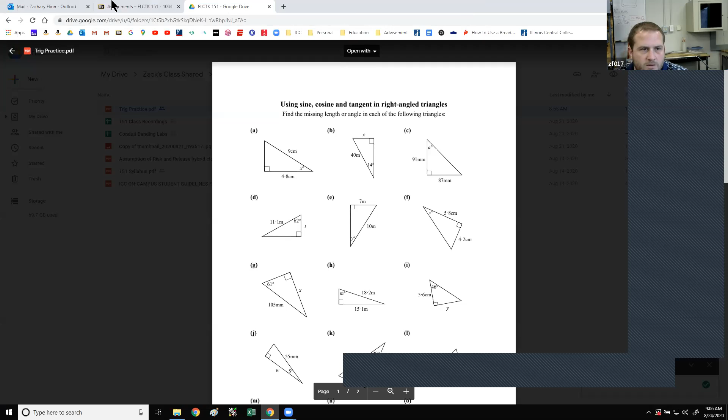Okie dokie, find this trig practice deal, and maybe I'll do this.

Let's start with A, B, C, D, E, and F. If you guys want to do those on a scratch piece of paper, and then we'll go over the answers together, see them worked out, we can do that. We'll just spend some time this morning doing some practice, and then if everybody's ready to go, we'll take the quiz.

Capiche? Sure. Yep. So, how can I do this?

Why don't you all take your turn? Is that supposed to be 4.8, or is it 4 times 8? Yeah, if you see the dot, that's supposed to be point, like 4. Oh, okay. And on D, it's 11.1. Okay.

So why don't you all turn your videos off, and then when you're done, turn your videos on, so I know. Which ones, A through D? Let's do A through F. Okay, can you see A through F on my screen? Yeah, okay. You can open them up on Drive, or you can use my screen, whatever you want.

Is anyone else's screen getting blocked by something? Yep, yeah. What's the matter? There's a text block in the middle of the screen now. Is that better? Yep, yeah.

Virginia, are you done by chance? Yeah, just up to F, right? Am I supposed to be able to see the rest of them? No, you're just supposed to show your video when you're done so that we're all, but as long as you're done, we can. Just a second. Oh, you don't have, now that I know you're done, you don't have to, but all right. Okay.

Is this like a test or just practice? No, this is just practice. Okay.

Can y'all see my whiteboard? No, oh, there's a carbon fiber big square block in front of it. There's a carbon fiber square. That's nice.

You can't see what I'm doing? Oh, it's just a big block in front of everything. Yeah. How about now? There we go. Good. Yeah, see the whiteboard? Yes, yes, okay.

A, what did we get? Ooh, purple. 57.77, I don't know, degrees. Yeah, I'm just going to run with these. If you guys got something else or if you need me to work through it, let me know. I'm all good there. B, 9.68. Yep, roger. I feel smart right now. I hope that don't change.

C, 43.71, degrees, yeah. D, 5.21.

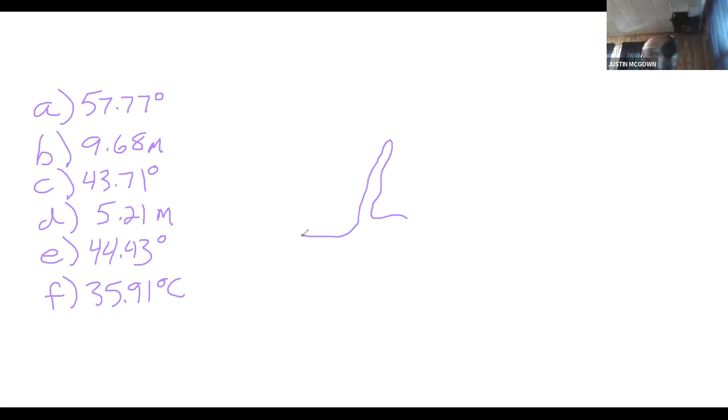Freedom units. All right, so seems like you guys are good. Yeah, it seems like it. I'm happy with my understanding. Oh my God.

Industrial accident on the thumb. Got caught in a press. Yeah. That's not any better, Zach. I'm just saying.

Are classes free for you? Because you could get an art class and get... Oh, so you're flipping us off. No, that's a thumbs up. Sure it is, yeah, sure that's a thumbs up. A little single finger salute there.

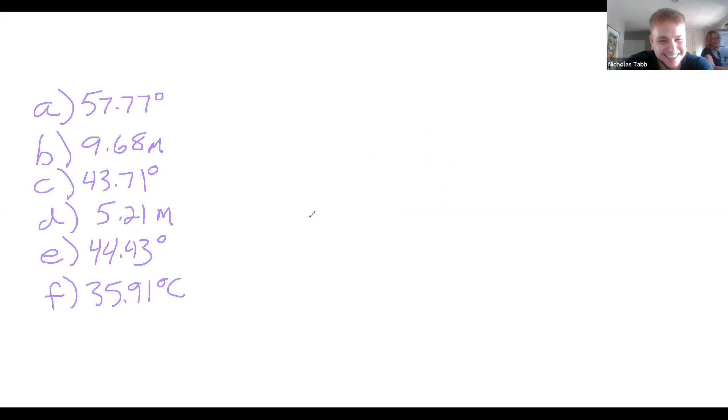Hi, Nick's mom. Are you making us all coffee? Because we need it. That's my girlfriend, that's not my mom. Hey, way to go, Nick.

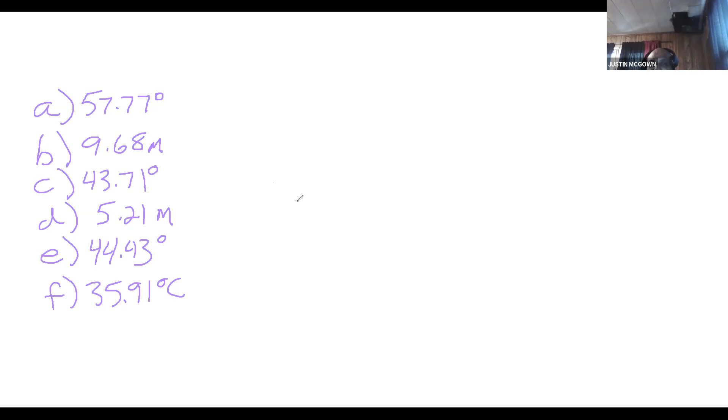All right, well we can do some more examples or we can go ahead and take this quiz. I think I'm ready for the quiz. I don't know, here's the thing, what you're going to see on the quiz is set up a little bit differently. I'd recommend using paper and drawing it out because it's going to look a little confusing. But it's going to say something like...

A, B, C, and then the opposite of those angles is going to be big A, big B, big C. And then there's going to be a table. I don't like this already, Zach. You do or you don't. I don't like where this is going. It's all math, it all stays the same.

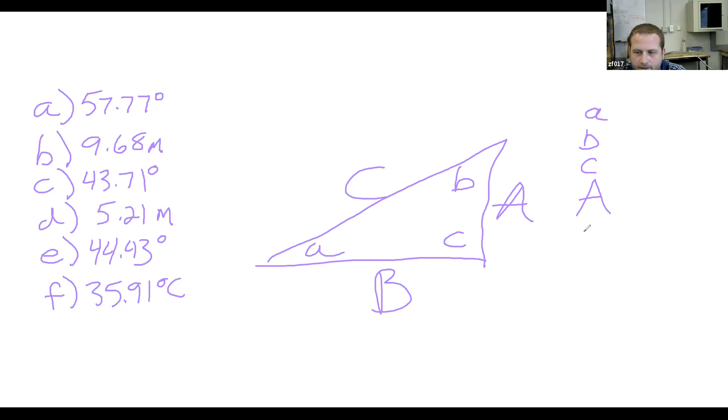Okay, so then it's going to say A is 26 degrees, big A is 5 feet. Find what C is. So if I'm you, I'm redrawing this thing so it looks like this, and put the numbers in. So this would be 26 degrees, A is 5 feet, and we need to find this.

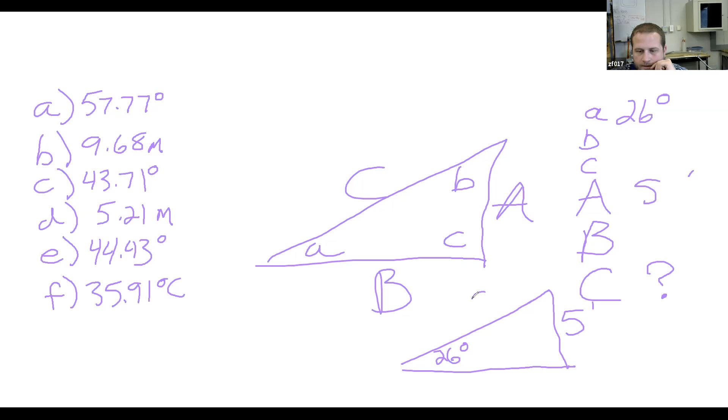All right, this looks a lot less confusing, right? I'll draw it on a piece of paper. Why can't we just keep it simple? I like the KISS method. Why can't we just keep it simple? Well, okay, here in 8 weeks you can teach yourself this class and then you can draw up these tests however you want, Justin. Oh, all right, I'm gonna go for that then.

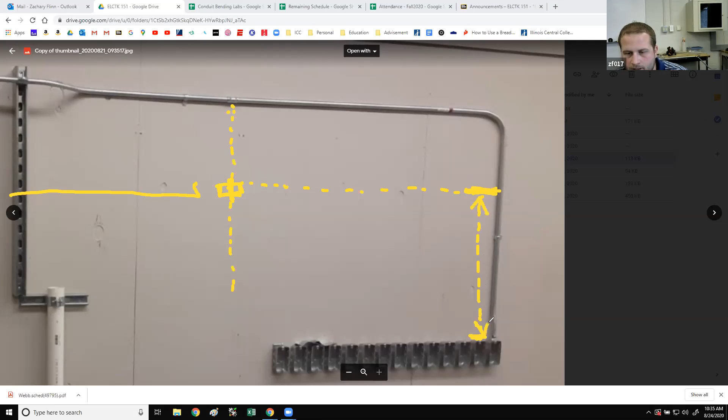Because the next pipe down right here, cut inside of it, is going to have a smaller length this way and a smaller length this way, right? That means the stub's going to be shorter each time, huh?

Yep. So what I want you to do is, if you're working on this lab, I want you to take the next space down. Make everybody else do a 3-point over yours. So the next person is going to come from this next coupling down.

So this is 1/2 inch EMT. The other one, the third bend, is this right here, and I haven't put a pipe in there yet, but there's going to be a little 3/4 inch EMT, and then you're going to have a 3-point saddle going over this pipe and back down and over. And then we're just going to call this a set distance. So you just match whatever I put up there for length and put your pipe in.

And then when you're done with a pipe, you're going to put your initials on it in Sharpie, for 2 reasons. One, it shows me that you're done with that lab. So up in here somewhere, I'll put my name, and then you put your initials on there. So one, I know that you did that bend, and two, it kind of causes you to take a little bit of pride in your work. Everybody's going to see your 4-point saddle, you know?

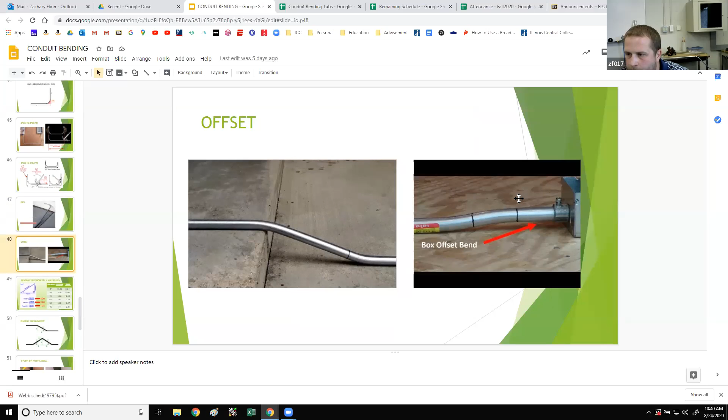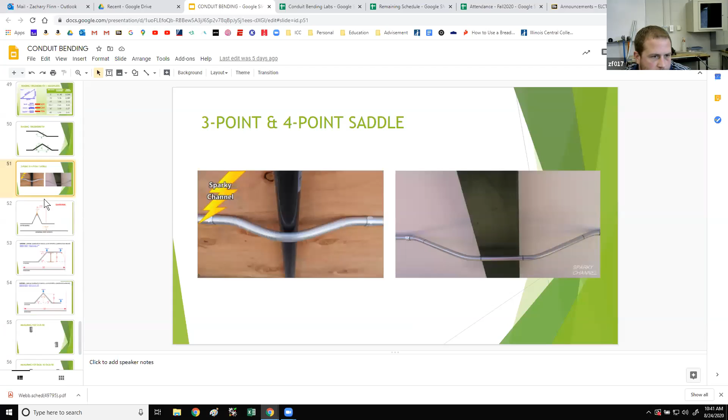Okay, real quick, I want to show you on Blackboard some other things. If you're doing your labs and you get on YouTube to go back over how I showed you to do things, there's some other references for you guys to use too on Blackboard. Let me show you, I think it's this one. There's some videos you can watch, but this hand bending conduit should be a PDF.

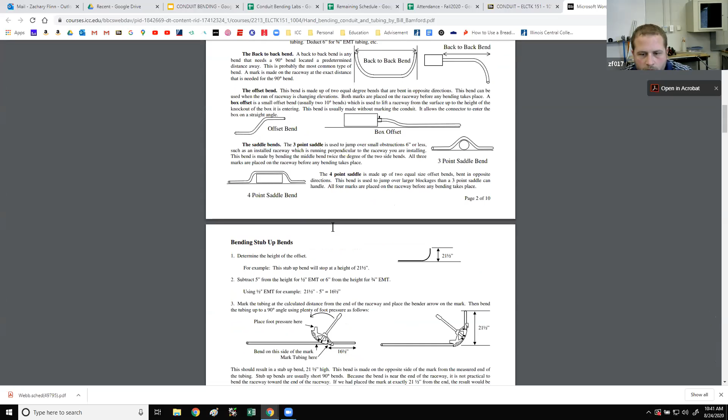It's pretty handy because you can see they show you exactly where to have the shoe, right? And for all these bends, it's important that you have the shoe facing in the right direction. Like the back-to-back 90 that I showed you, if you on the second bend flipped your shoe the wrong way, it wouldn't come out right. It wouldn't be the measurement that you wanted.

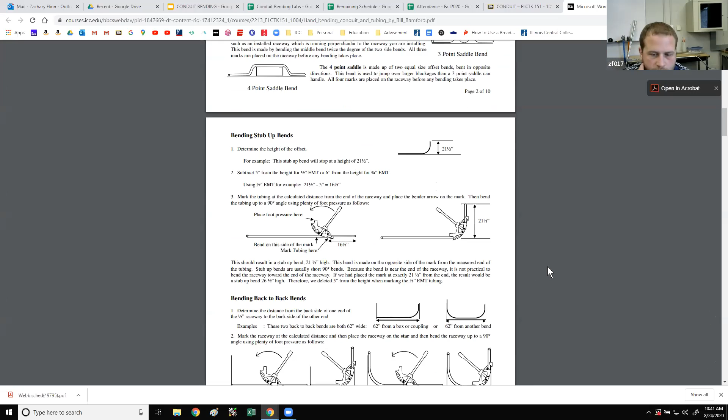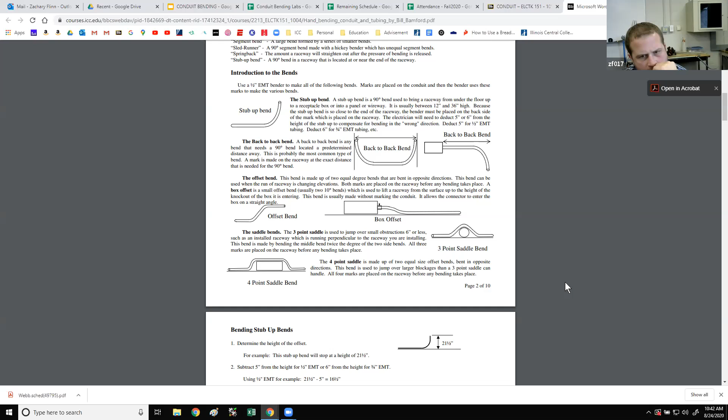Is this on Drive? This is on Blackboard, but I can put it on the drive. Oh, okay. Blackboard's fine.

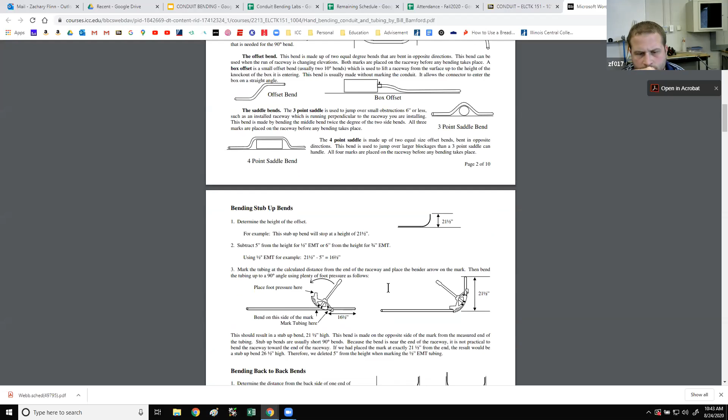I wanted to look and see where they put the rim notch or the teardrop, because that's what we're going to use today. The teardrop is used for the center bend on 3-point saddles. Here we go. So this page here is what I'm going to talk about today.

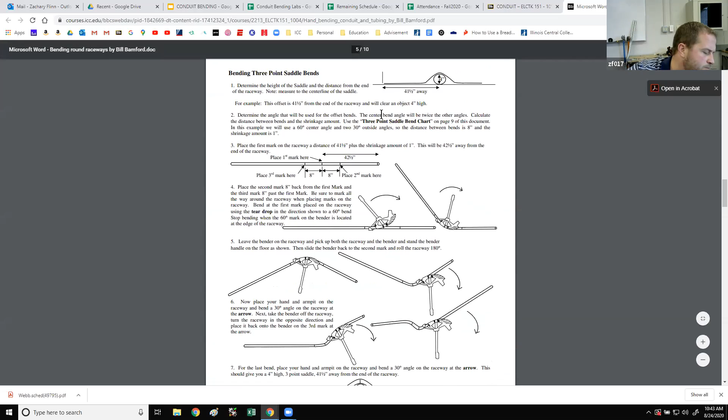Potential spam. Should I answer it? It's delicious. Is your car's warranty about to expire? Mm-hmm.

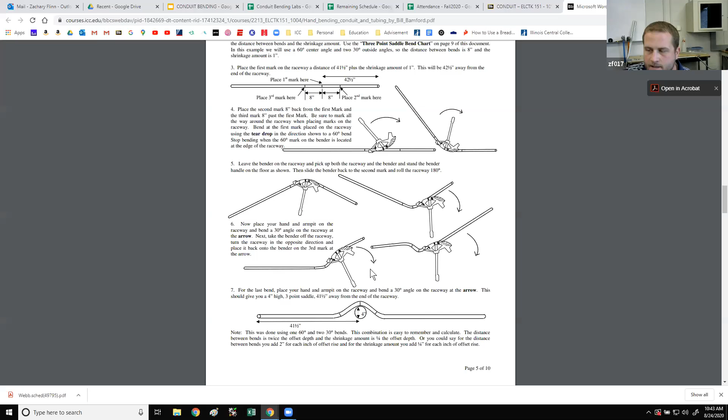Okay, you see where it says 60s and 30s? I'm pretty sure most benders are only going to have one rim notch. Yeah, some of them might be marked for 60s for your center bend or 45s. So we're going to use 60 today. And then 4-point saddles is actually pretty easy because it's 2 back-to-back offsets that you guys already know how to do. So, all right, here's the 3-point saddle.

I'm going to do this on 3/4-inch pipe. And I want the saddle to be 3 inches tall. So I want it to be 3 inches tall. And 30 inches away from my fitting.

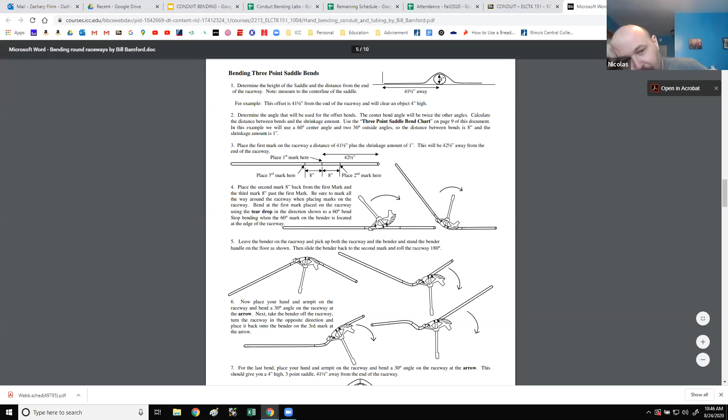Whenever you're ready, Zach, can you rearrange the camera? Why are you yelling at me? Caw, caw, caw. Oh, man. Whoa. That was weird. How'd you get on the ceiling?

Okay, so what I'm doing is I'm coming over 30 inches. So this distance is 30 inches. And my obstruction is, let's pretend it's like a pipe, 3 inches tall. Man, it's Monday, I can tell. 3 inches tall obstruction.

Remember the center bend that PDF tells you is 60? So if we were doing 2 triangles back to back, and this was 60, what would that make each of those? 30. 30. That's 30, 60, 90. Should be. But I'm not so sure that's right. That would make this 60. Yeah, that's right, because then this would be, it just doesn't look right. It looks backwards.

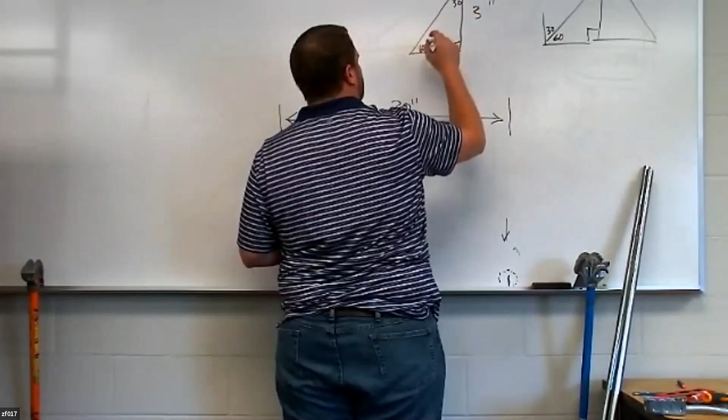So anyway, this is 3-inch tall obstruction, and we want this to be 30, this to be 60. So our pipe is going to look like this. I thought the center one was supposed to be 60 and the 2 outsides were supposed to be 30. Don't you bend the center one first? If you bend the center 60, then you're bisecting that in the middle. So you're going to have two 30-degree angles on either side.

Right, so pretend this line isn't there. This center bend is going to be 60. And then your two outside ones are going to be 30s. 30. Right, right. Yeah. I don't know. I'm really feeling the Monday.

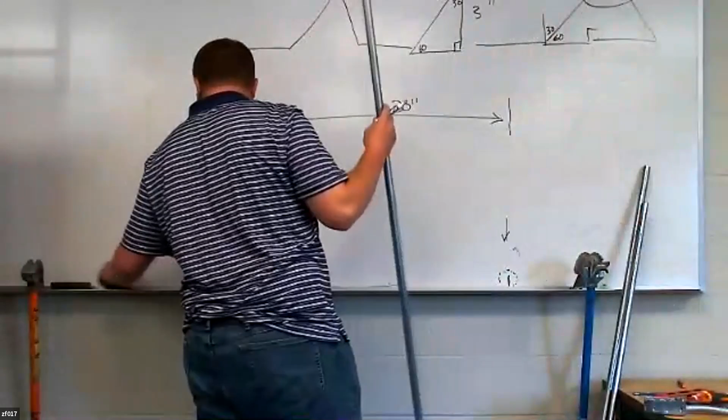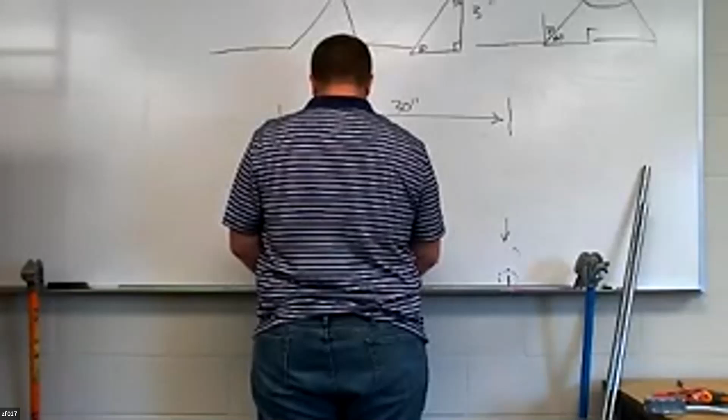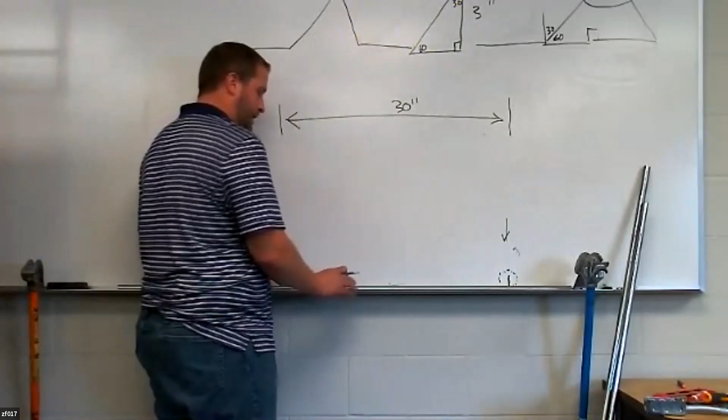So 3, it'd be 6 to the center from either side. That would be 3 times 2 is 6. So I got my center mark. This is at 30 inches, and then I need to go 6 inches this way and 6 inches this way. Right.

I'm trying. I'm sorry. Ugh. Try harder.

Okay, so what is our first? I got 3 marks. Where's my first bend going to be, and what mark am I putting it on? First bend's going to be in the center. So center mark. Yep. I got a mark there, a mark there, and a mark there. Center mark on which mark on the bender? It's going to be on the rim notch for 60. Why? Because that's the way it's designed. Right. The rim notch gives you the center of a 60-degree bend.

Okay, so if the bend starts here and it ends up down here, that should be, I'm not so sure this is right, but we're going to try it anyway. 3/4 inch pipe's a little harder to work with, by the way.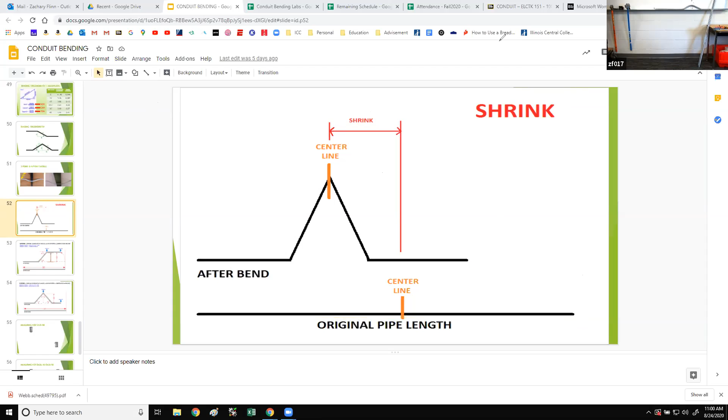So the formula for shrink is this: the shrink constant of the angle. We're going to get that from this cheat sheet. So here's the shrink constant. And we did ours on, it's basically a back-to-back 30, right? 2 back-to-back 30-degree offsets. Yeah. So if we did ours on a 30, the shrink constant is going to be

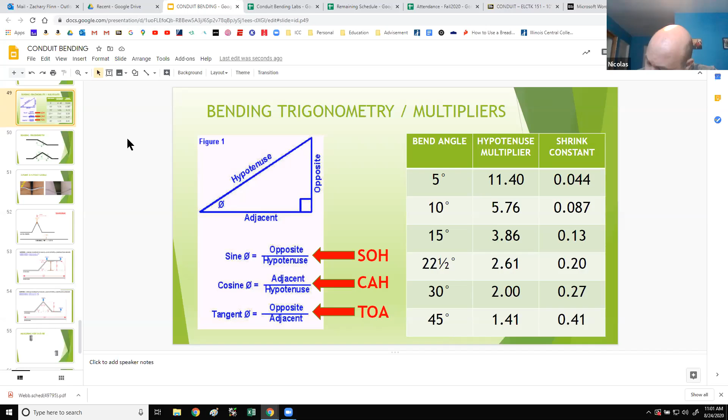0.27 times the height times the number of offsets. Does that make sense? Sure. So this example shows it. Shrink constant of the angle times the number of offsets times the obstruction height. I'm going to show you why right now with my magic pen. So why would it be times the number of offsets? Well, this is one offset. So the shrink at point A is going to be the same as the shrink at point B.

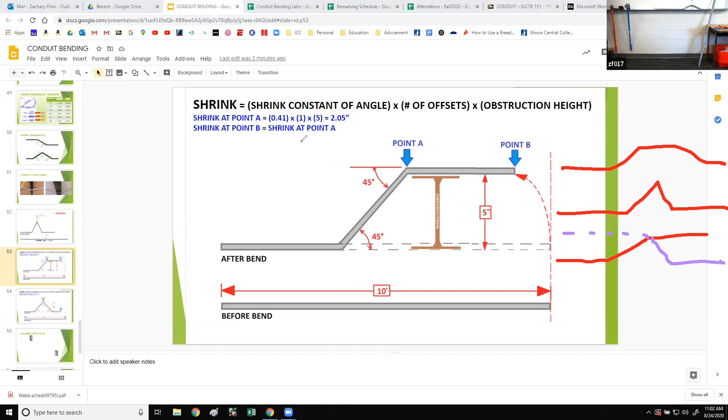But if you had 2 back-to-back offsets, so either a 4-point saddle or a 3-point saddle, a 3-point saddle is really just 2 offsets all the way butted up to each other. Right? So an offset this way and an offset this way. Right? So the shrink of a regular offset, you're going to have one shrinkage at point B and at point A.

For a 3-point saddle, you're going to have 2 different shrinkages at point A and point B because there's 2 different offsets. Point A, you're only dealing with 1 offset. Point B, you're dealing with 2 offsets. Does that make sense? So this is giving you an example with 45-degree angles. We're going to look at, whoa.

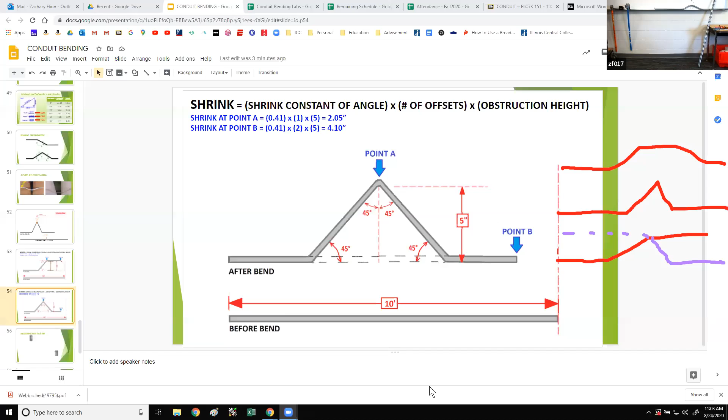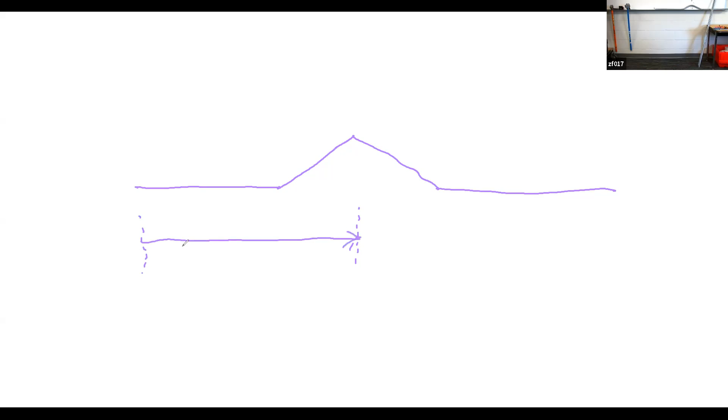For that pipe that I just bent, I came over 30 inches. So this distance here to here was 30 inches. And then I came up how many inches? 3. Very good, 3. So how do we calculate shrink with that formula? At this point, let's call this point A.

Need the table of constants. What's the shrink constant for 30 for 3/4? Is it in your Ugly's book? Probably is somewhere. Brenna, you're our Ugly's book expert. Find shrink constant.

All I'm seeing is info for shrink on one-shot bends. Your cute little table's not in here that I can see. And it is cute. It's precious.

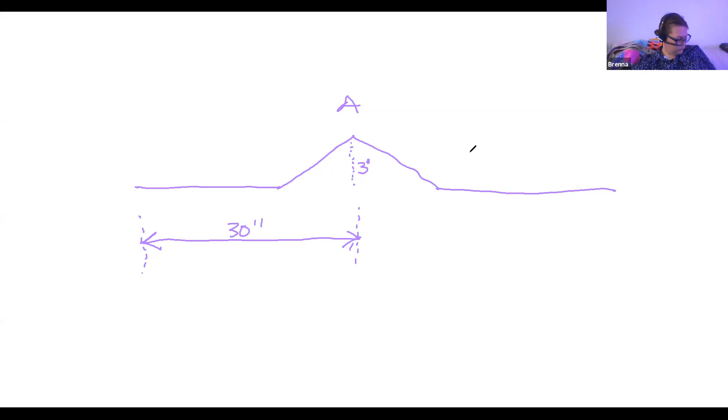Let's see. Shrink constant for angle less than 60 is the degrees of the angle over 120. So if you're doing 30 over 120, that would be 1 over 4, 1/4. I'm really surprised it's not in there. All right. Well, we can figure out the shrink constant, but we'll do that later.

Shrink constant on your table for 30s is 0.27. So that means 0.27 times however many inches of height. So we're doing 3 inches. So for every inch of obstruction or every inch of height on your offset or your saddle, you're going to lose a 1/4 inch. So we're going to lose about 3/4 of an inch on this bend. Make sense? Yeah.

So to account for shrink on this, where would I have made that center mark? So here's my original pipe. From this end, where should I have marked that pipe, knowing what the shrink was going to be? You're going to add 3/4 of an inch. Right. So I should have made it at 30 3/4. So right here, because when I bend it, it's going to go this way, 3/4 of an inch.

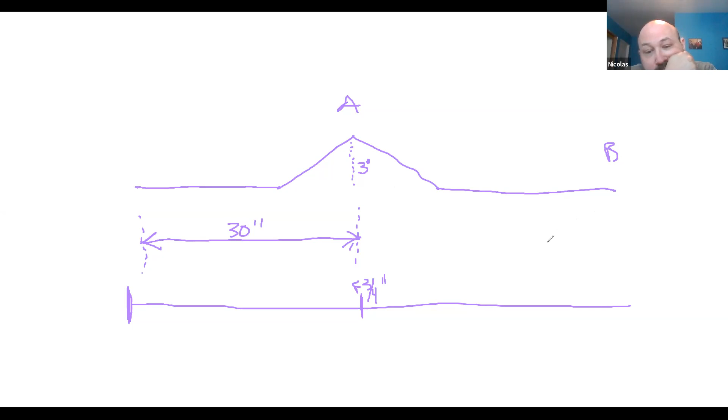Let's do the same example, but, well, let's finish this off. Point B, how much did that shrink? 3/4. Twice that, because you've got 2 offsets. At point A, we're just pretending we did that. At point B, we did that and shrunk it again. Make sense?

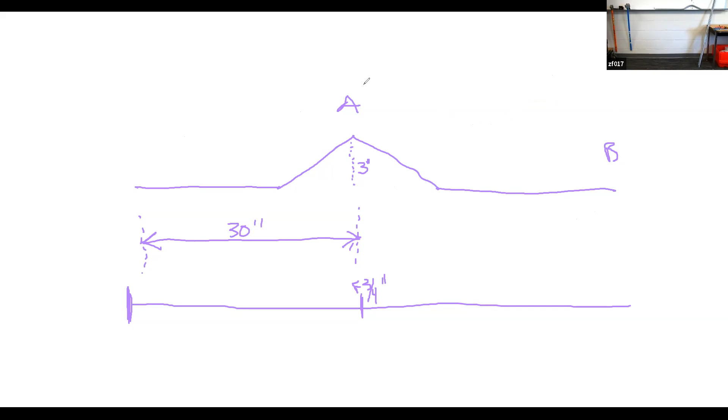All right, so if I asked you, I've got a 4-point saddle on 45s. The original pipe length was 8 feet. So 8 feet, how much did it shrink? Are you still using the 3-inch height obstruction? Good question. Let's go 4 inches.

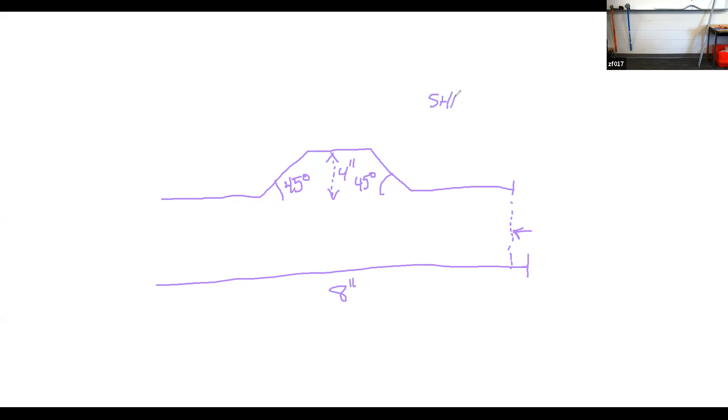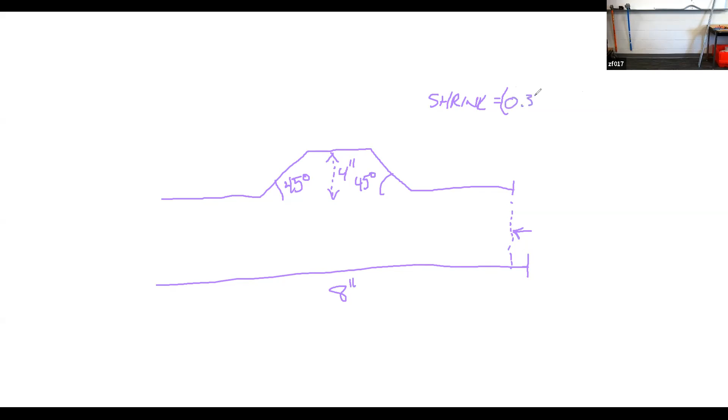Obstruction times 2. What do you end up with? 3. 3 inches, basically? Yeah. So that means that this shrink is 3 inches. What would it have been right here at the center of the obstruction? Would have been half that, right? 1.5. Right. So the shrink at this point would have been 1.5.

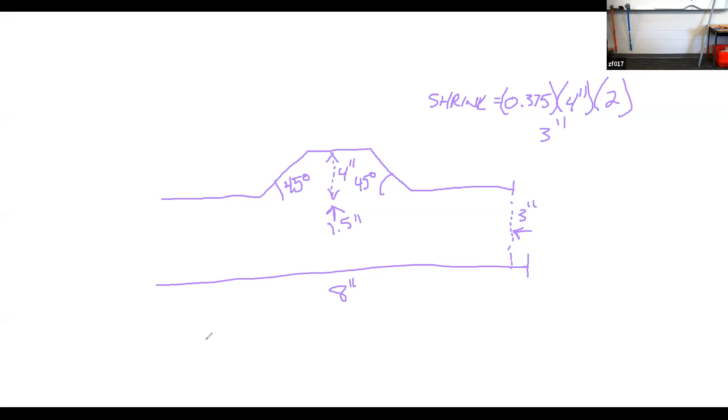Questions on shrink? Does it matter what size shoe you use to bend it? Will that cause a different shrink? No. Okay. Because shrink only has to do with the math, the angles, the trig, right? All a shrink is triangles. We don't care what the radius of the bender is.

That being said, you're not going to bend a 3-point saddle on a 3-inch rigid triple nickel. You don't have the room to work with there. Right. Unless you did it on like 10-degree angles. But that's getting above and beyond what we need for this class.

All right, I'm going to show you a 4-point saddle. Good grief, it's 11:15 already. I'm going to show you 4-point saddle. We'll go over where to measure for this stuff. Well, we need to get that. 4-point saddle. Are you comfortable you guys could do that? With practice, maybe. Without me showing you? Yeah. Probably with practice. It's 2 back-to-back offsets, right?

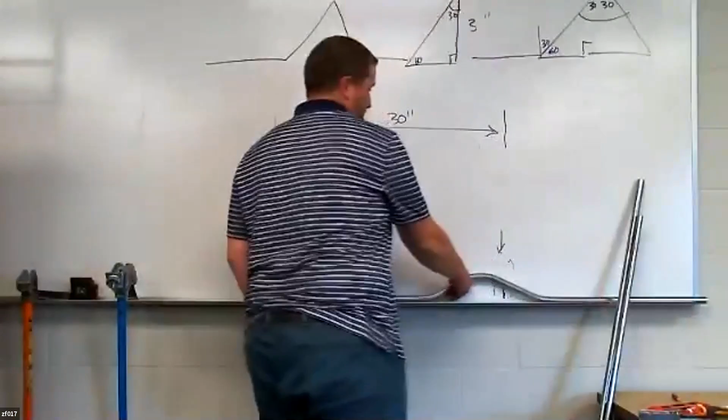I'll do an example. I'm probably gonna have to get in there and work with it a little bit before I can say I can do any of this stuff. I don't really learn by watching you do it. I gotta kind of do it myself. All right. Yeah. So. All right, let's do an example. Let's do the same thing with 4-point saddle instead of a 3-point saddle.

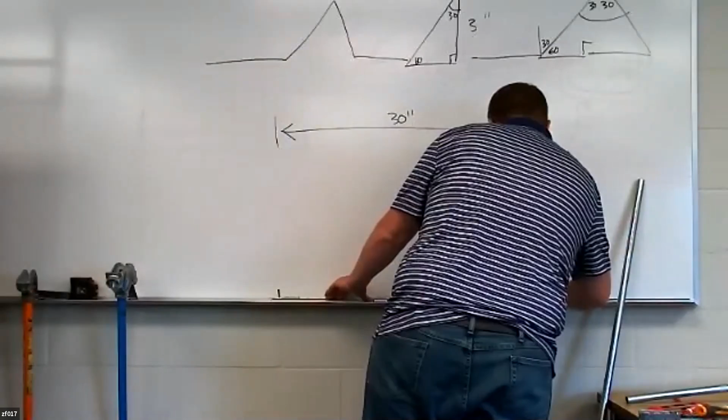So I'm just gonna, I don't care about shrink or anything, this is just to do an example. I'm gonna mark where the center of this thing is. And then let's do a 45-degree offset on either side of it. And let's say we want it to be, I don't know, 4 inches apart. So I have a center mark where I want that to be. And I want them to be 4 inches apart. So basically I want the flat part of my saddle to be 4 inches wide.

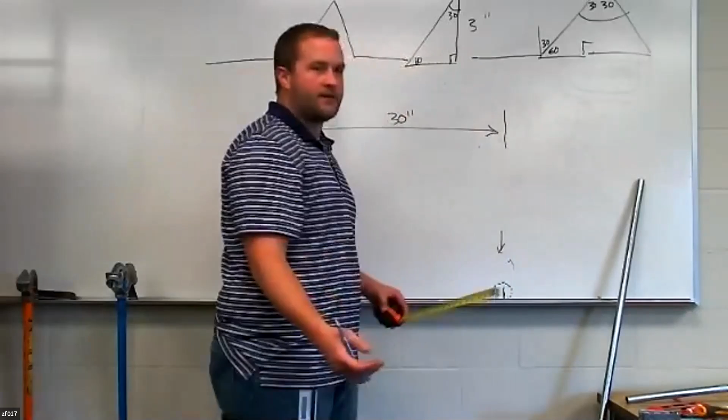So I'm gonna make a mark 2 inches over here, 2 inches over here. That gives me my 4-inch flat part. Then it's just two offsets back to back. So if I'm doing this on 45s, how far apart do my marks have to be? So 7 inches. Says 2.5 times 3, right? We're going 3 inches tall. Right. And for 45, the multiplier is 2.5. Is that right? I'm guessing. This is why I don't memorize that stuff.

But I do know that the sine of 45 is going to be 3 over my hypotenuse, which is going to be the distance between my marks. So 3 divided by sine of 45. 7.5. I got 4.24. What is it? 4.24? Yep. Three divided by the sine of 45 is 4.24. Yes, sir. Okay, so that means these marks are going to be 4.24 apart. Let's see if I have the room to make that bend. So basically 4 1/4.

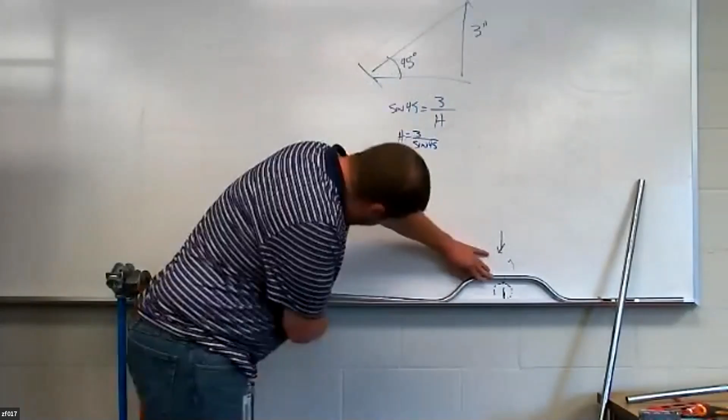Okay, so that's a 4-point saddle. Pretty easy, just two offsets. All right, let's quickly go over stub 90s. Where am I going to measure at for here? What do I need to measure? So I'm going to have a level with me, and I'm going to transpose some marks. Okay. What distances do I need? You need the stub distance and the take up, right? Yeah.

Really? Let's say this is 1/2-inch EMT. Are you showing us something right now? Oh, no. Okay. That would explain a lot. Now I am. Yeah. All right.

So I need to put this pipe in there and a 1/2-inch EMT. 5-inch take up. Where'd my frickin', there it is. All right, so take up is 5 inches. Okay. So I need to know this from the outside of this coupling right there to here. I need to know that distance. And I need to know how tall it's going to be. You can do one or the other because 1/2-inch EMT will just make the bend and cut it off where we need to. Yeah. Let's say we need to know this distance.

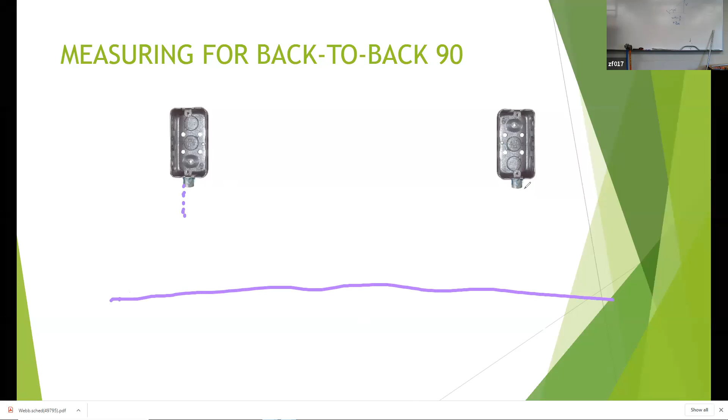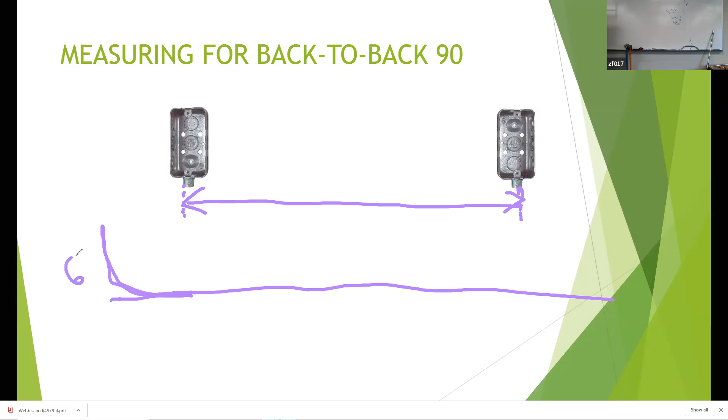So I'm going to bend a stub 90, however tall I want it. Let's say I want it to be 6 inches tall. So I bent this stub 90. And then this is, what did I say? 40 what? 42 inches, whatever. Okay, so then we're going to go from here, come over 42 inches, make a mark, and then put this on the star and bend it up. The star is the back of a 90-degree bend. So when you bend this up, it should put the back of the 90 right at 42 inches.